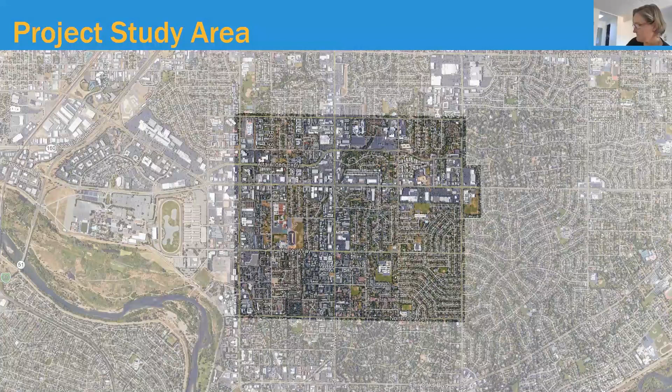To ground everyone in the project location, this is the project study area. From the west, the boundary is Howe, and on the east it's Watt Avenue, with the exception of a small bump out to the east of the intersection of Arden Way and Watt, to include the middle school and the development to the north of that. On the north, the project study area is bounded by Cottage Way, and to the south, Northrop Avenue. So that's generally where we're looking in the project study area.

We'll have another design charrette where we'll advance. What you're going to see tonight is a lot of starter ideas - we like to call them starter ideas. Again, it's not set in stone at all. It's about ideas that we generate based on the conversation we've heard, and we'll come back in October for the second part of the charrette.

What we've seen in the corridor, as you know, we've gone through virtual tours in different areas and have been out on the corridor. I won't dwell too much on this - a lot of you have seen these slides before, but just a reminder that it's very easy to navigate this area by car. There's a lot of space allocated in our streets to the motor vehicle.

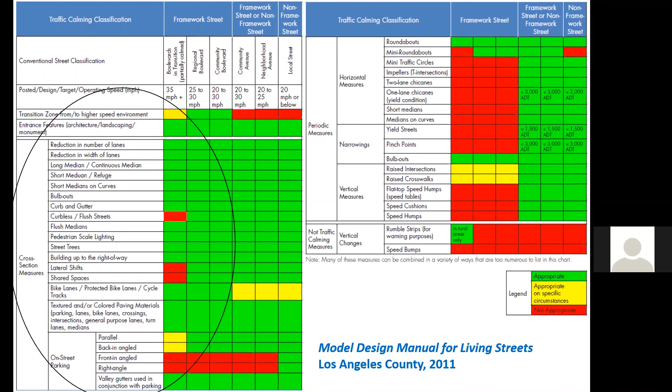Now, the design team has looked at a whole bunch of different types of measures to help motorists slow down while simultaneously achieving the vision of the community. Some of the ideas you'll see are the reduction in the number of lanes to make room for separated bike facilities and proper sidewalks and trees. You'll see street trees, some small medians, these sorts of things.

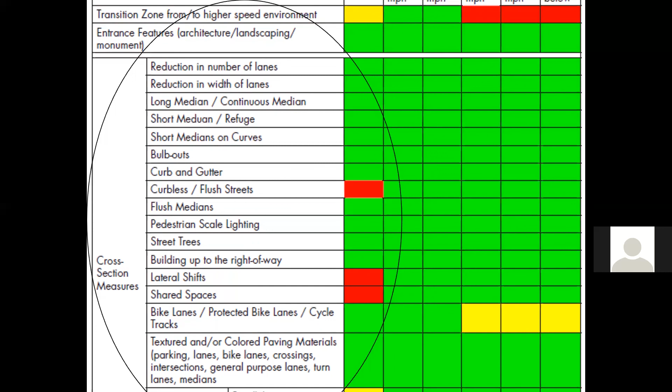The reason the federal government wants to do this is to make bicycling more appealing to the vast majority of the population. There's a small fraction of people who will ride anywhere. There's some enthusiastic people that will ride in conventional bike lanes, but most people are only comfortable riding when they have separated bike facilities. That's why the federal government is emphasizing that.

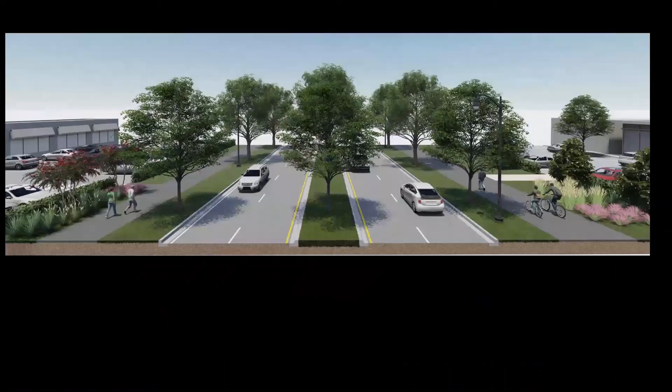On the right-hand side of this image, this is a big arterial road - you'll see a shared use path with some trees, so that's a comfortable edge. On the next slide, you'll see some painted bicycle facilities, either down the center or down the edge, buffered with a little 2 or 3 foot wide strip to keep them separated from motorists - fairly comfortable as well. But the home run is if it's completely separated with street trees and a curb and some sort of physical separation. Then kids, families, all the potential population of cyclists can use the street comfortably.

So the idea is to create what we call complete streets that are comfortable for all the different user groups. It's easy to accommodate buses, trucks, cars, but it's more difficult to comfortably accommodate the vulnerable users - the pedestrians, the cyclists - and also to support the businesses, neighborhoods, institutions, and recreational areas. In particular, out of that vulnerable group, there's some very vulnerable folks, like those with a mobility impairment or a sight impairment, or children, or elderly folks who might walk slower when crossing the street. These are the sorts of folks we're really interested in accommodating.

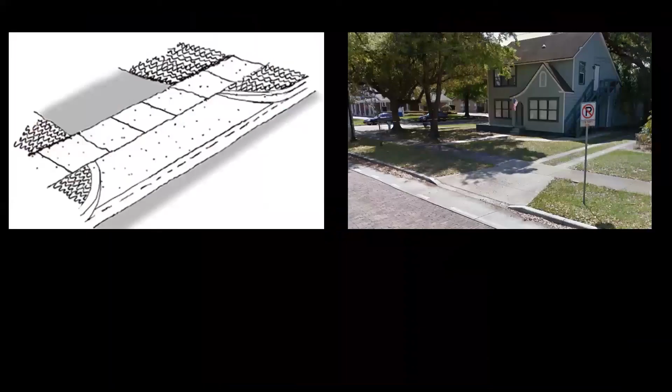Some of the changes we'd like to make are simple things like how to put a sidewalk across a driveway. The diagram on the left shows the sidewalk going across at the level of the sidewalk - it doesn't dip down to street level, so it's much more comfortable for someone to cross. Any elevation change is made up in what we call the apron between the sidewalk and the street, and there's a good example of that in the photograph on the right.

So they would follow the guide down to the edge of the street where there would be a warning strip, and then a push button in a predictable location, to get the signal to cross the street. These are the sorts of things we can do to enhance the built environment for people with various disabilities.

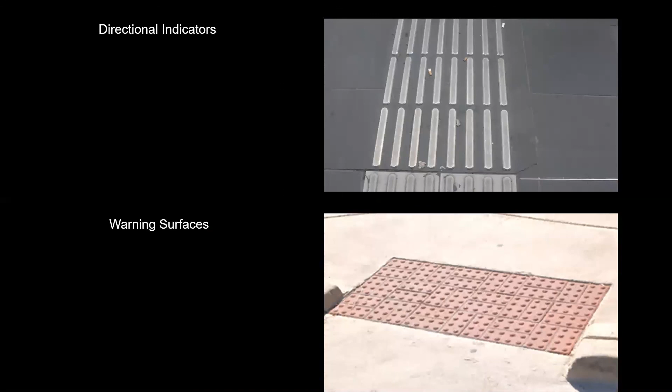So we have warning surfaces in the United States, but what we're suggesting to enhance things is what we call directional indicators.

Now, one of the past practices has been, when you're designing a street, to work from the inside out. Make everything okay for the motorists during peak hours, 20 years in the future, that sort of thing. And then the leftover spaces for trees, sidewalks, bike facilities come afterwards, if they fit. And that's been the problem in this area — they didn't fit, and so all of those populations were left out.

So what we'd like to do, and what is best practice, is to start thinking from the outside in, where you accommodate the vulnerable folks first, and then work your way in, using the balance of the space for the strongest folks, the folks in the cars in the middle. So you start from the outside and work your way in.

We have an idea for a parkway on what's now the Alta Arden Expressway. One of the cool things about parkways is the nice feeling as you go slowly through that sort of park-like environment. And instead of doing signals, we're thinking maybe do roundabouts, which keep things moving.

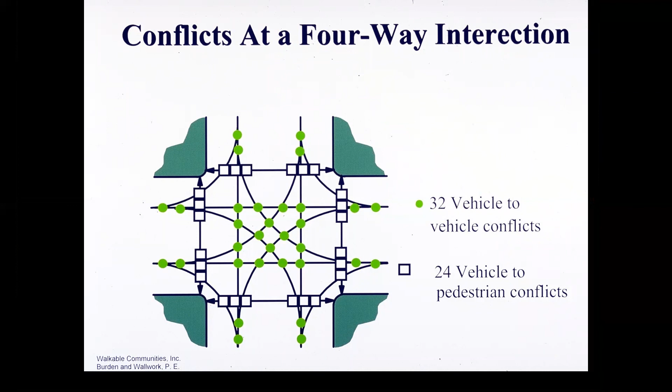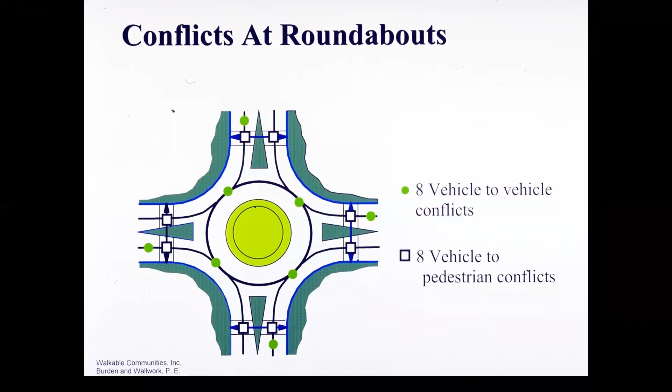One of the nice things about roundabouts is they have very few conflict points, unlike signals like shown here — look at all the different ways you can crash at a signal. At a roundabout, there are far fewer of those. So it's no coincidence that there's about half the number of crashes in roundabouts compared to signals, and about 80 to 90% fewer deaths and injuries. And they're quite safe if they're well designed for cyclists and pedestrians.

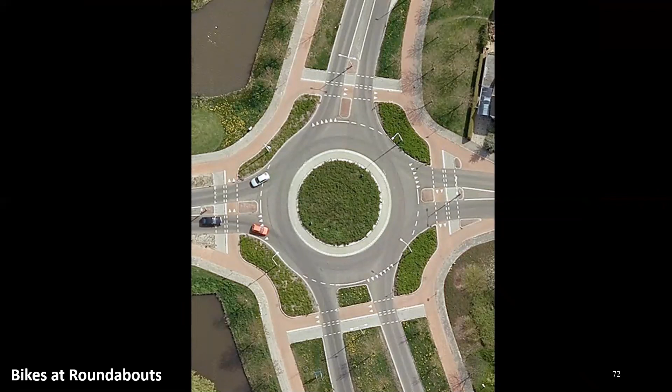This is what we're proposing in this corridor, so you don't have to ride in the street itself. You just have to size these things so deliveries and so forth, and fire trucks, can get through, but that's routine and not difficult.

The disadvantages of roundabouts — there are a couple. Sometimes they don't fit in the space, so we'll have to test it to make sure the roundabout fits. And roundabouts don't work very well at really high traffic volumes, but that's not the case along the Alta Arden Expressway. But there are tons of advantages: crash reduction, emission reduction, speeding reduction, friendly to active transportation, and it's attractive. So plenty of reasons to support roundabouts.

I'd just like to end with a few — there's 4 — what we call design directives. We heard so much from people that this elevated itself to being a design directive. The first one, of the 4, is a comfortable, safe place to walk and ride a bike. That's super important.

The second one is to create spaces for trees and shade. It's so hot that if you don't have trees and shade, people still won't walk and ride their bikes as much as they ought to.

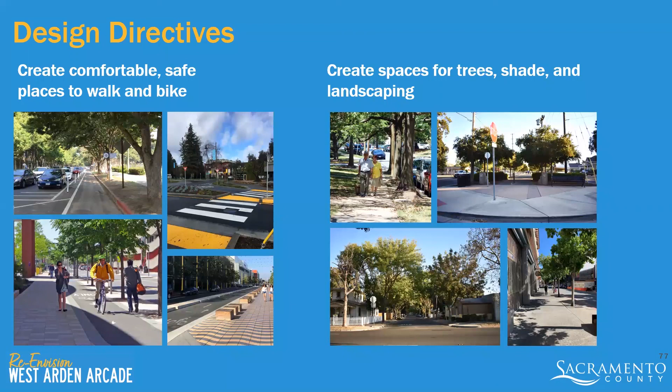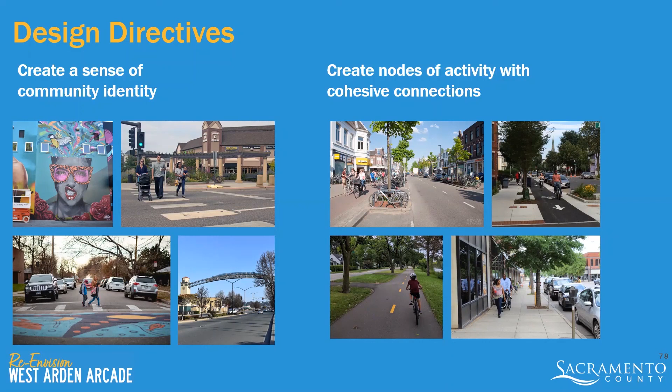And then finally, to create a series of connections and corridors that lead to nodes of activity, so there are things to go to on foot and bike in the community. That's very important for social cohesion. All these things add up to a multimodal place that reduces greenhouse gases, helps environmental justice, helps the climate, helps with affordability, resilience, public health, advancing the Americans with Disabilities Act, and social cohesion.

There's all sorts of collateral benefits for this type of thinking.

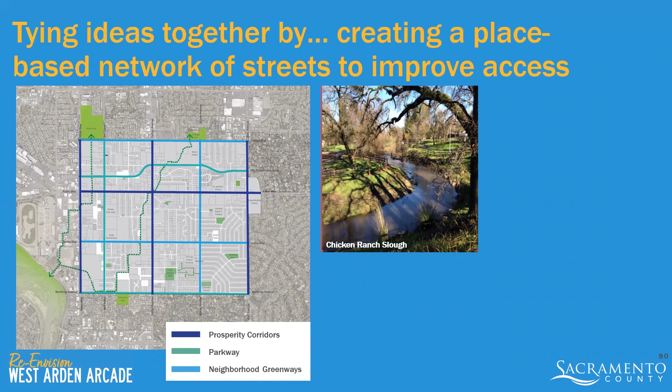After mapping where people like to gather and where people are heading, and looking at the future function of streets, what emerges is an initial idea about having nodes and corridors.

Each street, and it's not just the street right of way but also what's happening on either side, would create a corridor, and they would be corridors of different types in the future. Not every corridor is the same, and we want to create a sense of identity. This can partially be done by thinking in terms of mixed use corridors, more neighborhood serving corridors, and greenway corridors. As you can see, there are three different colors indicating this on the map.

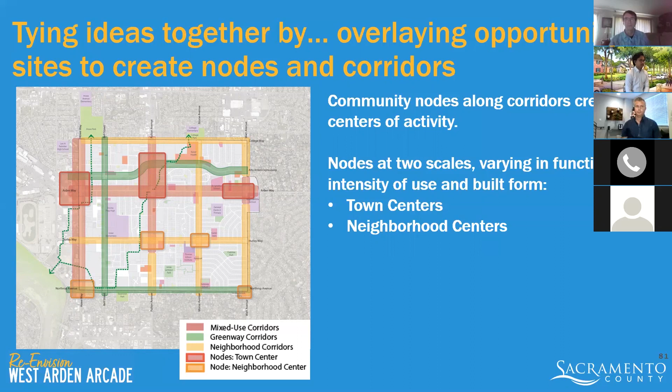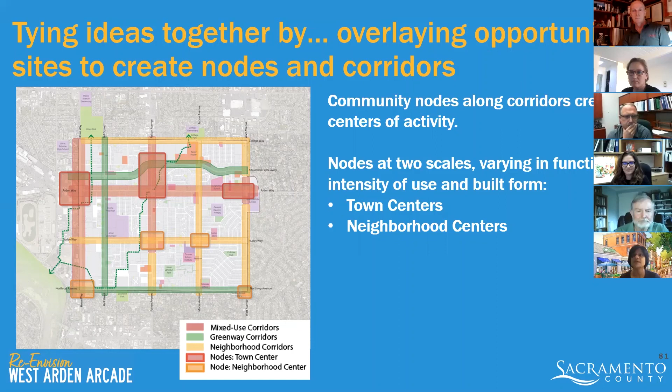Since we don't want each place along a corridor to feel exactly the same, we think in terms of nodes, areas where important corridors intersect. That's a place where something special can happen, where the intensity of uses and activities can be slightly more. We can also think in terms of different types of nodes. The first are town centers, a higher intensity use and more of a regional destination.

There's a reason for that, because when you have a mix of different uses, people come to these places and stay longer, giving a reason to be there, which makes these places inherently safer and more vibrant. This is also an opportunity to introduce features such as shared public spaces, shared streets, and other design ideas we might be exploring.

They're mixed use, they serve the local community. They can be something as simple as your corner store, or something like a local eatery. It can even be a venue for the local farmers market. It doesn't matter exactly what the uses are, but the point is that these are walkable places, inherently mixed use, and places where people would come and congregate.

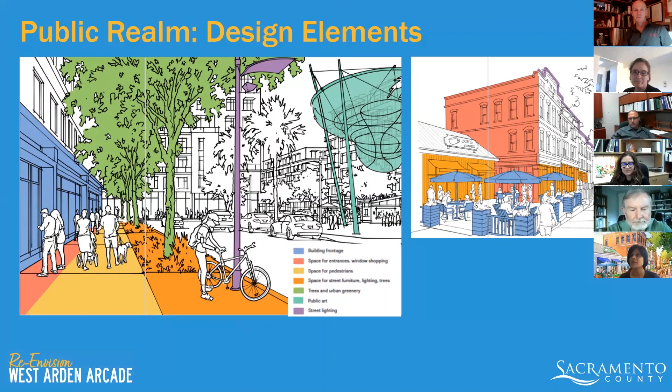So here are some of the common design elements we're going to be considering when we think about the urban form and the urban design elements that will guide the street design. The two go hand in hand, and these are just good design principles that we'll be considering.

One thing is about trying to carve out shared open spaces. These in particular can be just part of the private realm. They don't need to be new public spaces the city needs to discover, but through good design and good coding standards, we can create privately owned but publicly accessible small spaces. It's more about how these places are designed and where they're located, rather than the actual size, for them to be successful. Also, we have fairly large lots, and as they redevelop, they would have internal private spaces.

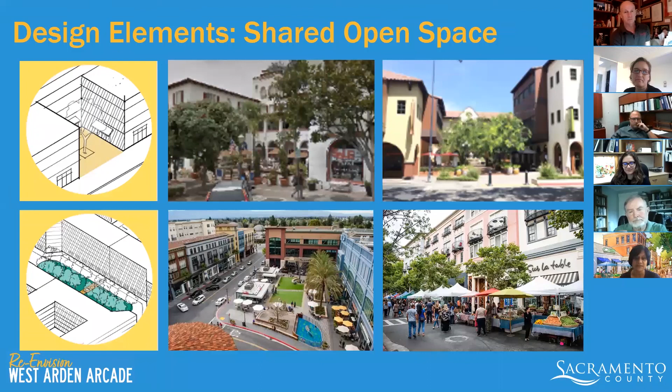So it'll be important to think about how the buildings orient, how they address internal areas. Are they just parking and servicing areas, or can they also serve the function of an open space which would be publicly accessible? Similarly, it's important to see how the buildings are oriented. We can't think of any space being vibrant and where people want to be unless you have entrances facing onto the sidewalk or onto the common shared spaces. So that's an important consideration, is building orientation.

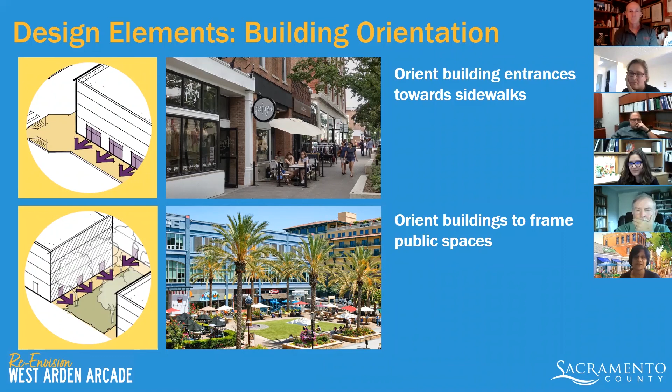And also important is parking lots. I know we all need parking lots, and there are many uses for which they're essential, but honestly, I don't think anyone enjoys looking at a parking lot or walking next to it. So there are many, many ways by which you can actually shield the parking and servicing so no one needs to know it's right there. But it creates a much more walkable and pleasant environment when you're going along the street.

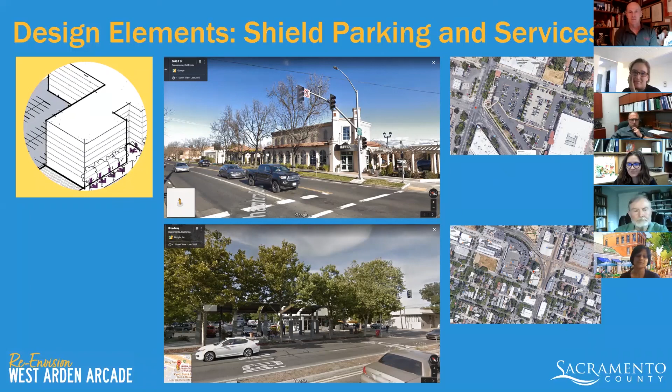So again, just simple ideas to try and activate the spaces, and that takes us to the place-based street network, and I'll hand it over to Patrick, who'll be dealing with these slides.

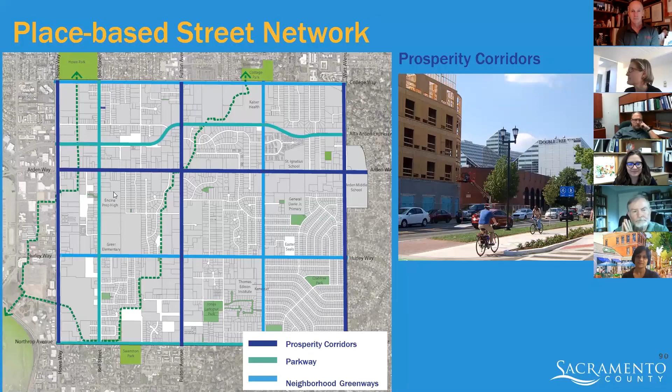This is an example of the prosperity street on the right, and if you click through, an example of the Parkway street. So really building on the different character elements of these.

One of the big things we heard throughout the week was really providing green space and shade. That was a major thing people wanted to see: safe spaces to recreate, be outside with your family, ways to get to school, and opportunities around that.

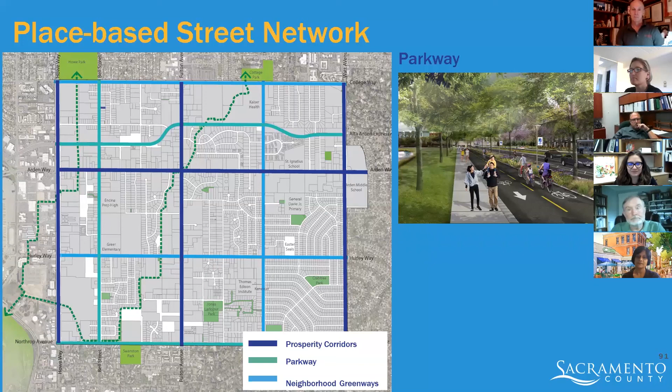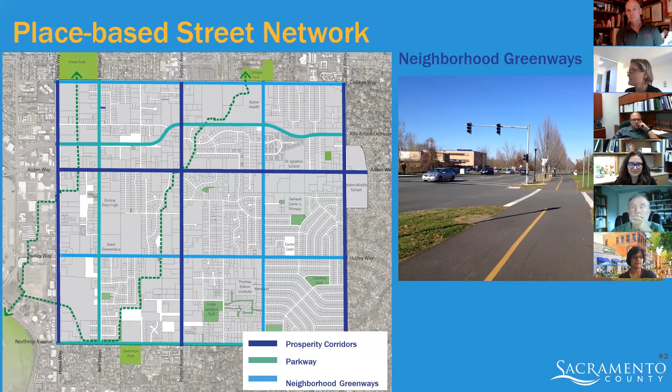Working our way down to a smaller street, thinking of neighborhood greenways. How do you connect really to those parks and key destinations? Parks and schools really are what this network is meant to access. Bell Street, Northrop, going to the American River Parkway - those are kind of how all of those would help funnel from the neighborhood to those destinations.

So really what we wanted to talk about - and these are all just starter concepts - was really how to knit it all together and where to start.

One of the options we're coming up with was this term about a responsive implementation strategy. We varied it out into 5 steps, and this is a street-focused plan, a street space-focused plan. We wanted to center that in this conversation.

Our step 1 is really thinking about a rapid community response network. These are the facilities, the streets from everything we've heard this week, that have the least amount of conflicts on them, but that access some really important key destinations and provide community-wide benefits.

So they're the ones such as Hurley Way, which gets you to the American River Parkway riverfront, to the Parkway, and then also to Bell Street, close to the schools, and all the way across to Watt. That would connect you with Morse, and then up to the north to College.

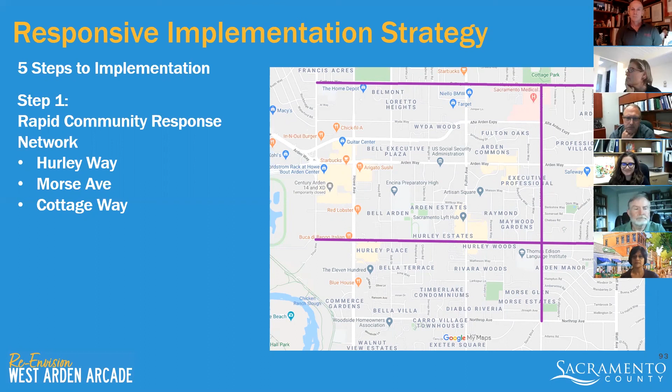This really works to avoid the major commercial corridors and helps with the idea of getting something on the ground really soon - a way that we can make sure this plan shows up in the community.

What I'm going to do is walk through each of these steps, and I'll show some cross sections that we'll talk a little bit more about later too, but just to give you an idea of what we're talking about.

What you can see on the left is the existing Cottage Way cross-section for the street. It has 3 lanes of traffic and on-street bike lanes. But what we've heard this week was that even if we have on-street bike lanes in the community, they either get blocked by vehicles or by trash cans, or they just don't feel comfortable for people to be out there.

Especially when you think about wanting to be out there with your family - would I want to take my grandma out there to ride? That's kind of how I think about it. Or would you feel comfortable with your kids? The way you might feel comfortable might be different depending on who you're with, and wanting to make this a family-friendly community is what we heard.

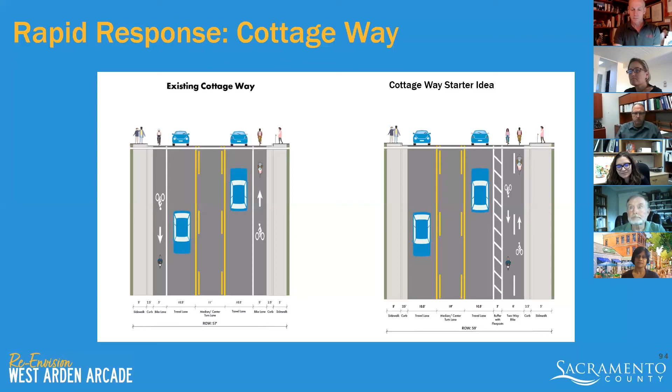One of the ideas on the right-hand side, the starter idea here, is really about this network of 3 streets that each have a consistent facility type. It's really legible and easy to navigate getting around the community, but it also has the striped buffer between the 2-way separated bikeway that has both a horizontal and a vertical separation from traffic - things that could be put on the ground with paint and buffers in the near term.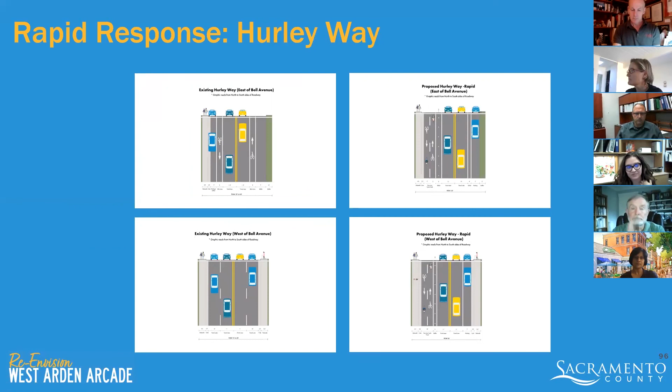So the idea here is in the community where we have 2 lanes of traffic, on-street bike lanes, and sometimes parking, would really be to shift where the bike lanes are and put them all on one side, on the north side, where you would really be accessing the schools. So that would really get you to the schools, into the park, and to the Parkway. Similar setup as Cottage Way, but also leaves parking there to make sure this gets rapidly implemented.

So step 2 is, now that we have the bright purple lines, which were the step 1 rapid network, really building out the community-wide network. If you think about it as a framework, you'll build it out to get all of the facilities to connect, so you'll have a circuitous route within the community and connect to the overall Arden Arcade network.

This is looking at Bell Street, at Encina High School, the elementary school and the upcoming middle school, and Empowerment Park. Bell Street and Northrop Ave would be kind of smaller community scale neighborhood greenways, giving you that tree canopy feeling, the shade that makes you want to be out there to walk and bike, and those would connect you to a larger Alta Arden Parkway.

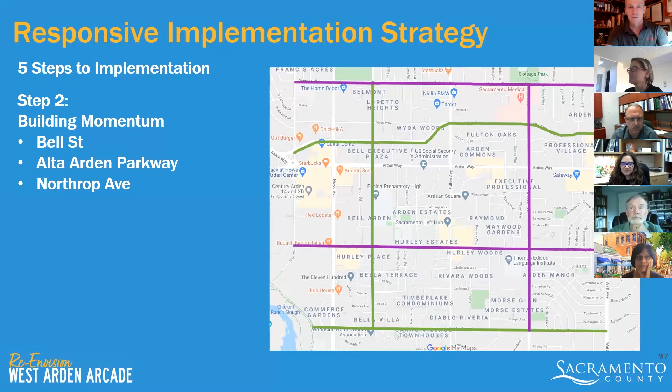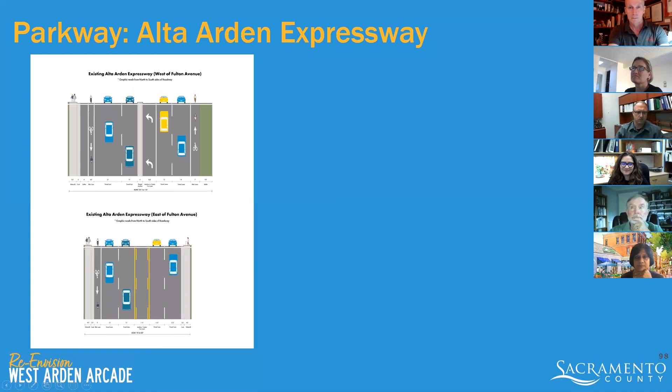Alta Arden itself has a lot of opportunity and is really wide, but doesn't actually have a huge amount of volume. As you can see, there are a few different sections of it, and we'll go over the opportunity for the cross-section in a sec, but there are wide opportunities there, so we'll come back to that one.

For Bell Street, one of these smaller neighborhood routes, we currently have about 57 to 60 feet of right-of-way, 2 lanes in each direction, bike lanes. What we heard resoundingly from folks at the elementary school and the high school is that people often block the bike lanes during drop-off and pickup, so for people biking to school it sometimes becomes unusable or uncomfortable to ride.

So really wanting that separated space, as you can see on the left-hand side, it would be providing parking, but then providing trees intermittently to keep shade space for people on both sides of the street. It's important to have access on both sides to make sure it's comfortable for everyone. On the right-hand side is a two-way separated bikeway, all at the same level, with shade on both sides, so if you're biking or walking you'd be comfortable, with a dedicated pedestrian space as well, so you can get to and from the schools, accommodating the larger volumes of people walking to school on Bell.

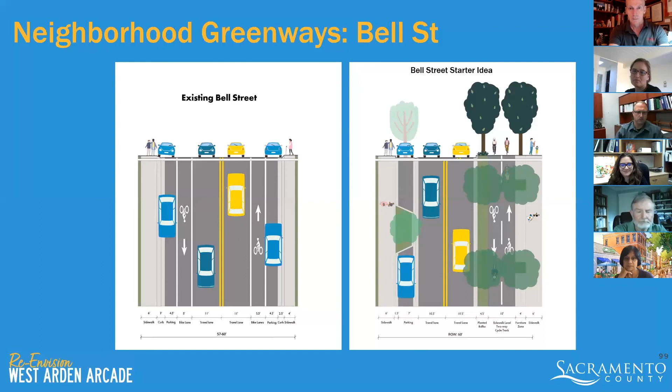If you want to go to the next one - Northrop, a little bit similar to Bell. Northrop is sometimes a little bit wider, but same kind of configuration. We'd actually be able to preserve parking on both sides of the street here, which is nice, so we can do trees intermittently in those parking configurations. What's a little different is that you'd have a shared facility.

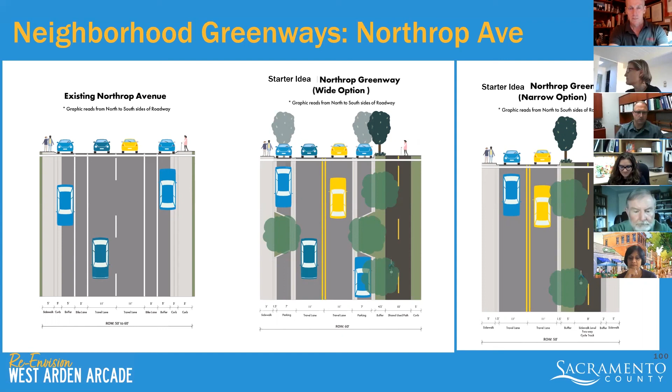Think of some of those images that Ian was showing earlier with some of those really nice trail-like facilities, building that greenway feeling to access the Parkway, so that same feeling connects to each other. When we narrow in some of the more narrow sections, on the right-hand side you still preserve that same feeling, but can provide separate space for walking and biking.

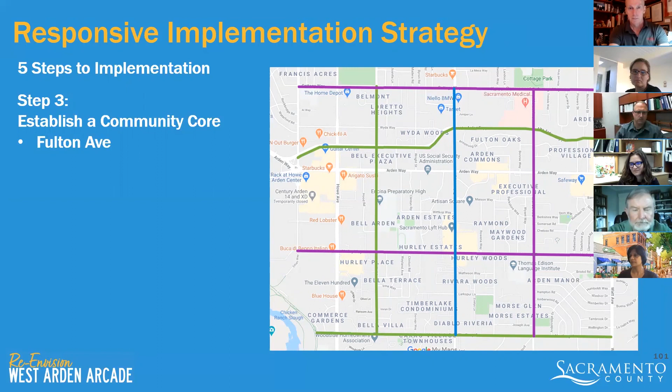So how do we build on that? Step 3, once you have the overall circuitous network, is establishing a community core. The idea is that Fulton becomes the heart of the community, building on a lot of the great work that the PBID, the Property Business Improvement District, has been doing there in the northern part. We really like the idea of extending that feeling down through the rest of the corridor and through the neighborhood parts. Initially we would think of narrowing some of the lanes.

So as you can see on the left-hand side, there is the wider cross section. In the northern side where you have the median in the middle, there's actually a built-out median as well in much of the area. But right now we have 2 lanes on either side of traffic, and then bike lanes. What happens with the bike lanes, if you go out there, that we heard a lot about, was that because it gets so close to the gutter and the traffic, it really feels uncomfortable, even though there is a dedicated space for cyclists.

So in the northern end, initially we might not consider doing anything and kind of think of it over time, but south of Arden Way, we're really considering reallocating some space to those people walking and biking and making it more of a pedestrian atmosphere.

So really, if you dropped a pin, I liked to think about this as we were talking about it. If you dropped yourself down anywhere in the project area, where would you want to gravitate to? Often we heard that kind of Fulton was one of those places, while Howe and Arden were more kind of regional destinations, so this is an opportunity to create that community center.

So you still provide landscaping, provide a fully raised separated bikeway, one on each side. As you get a wider cross section, it's actually easier, if you have the space, to have one-way cycling facilities on both sides. It actually helps work with your signal operations as well, but this provides a much wider pedestrian environment.

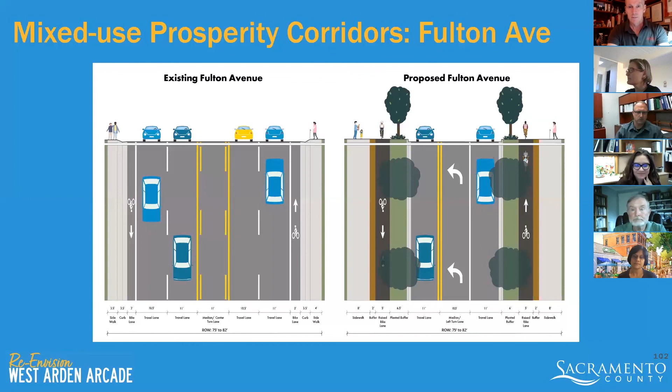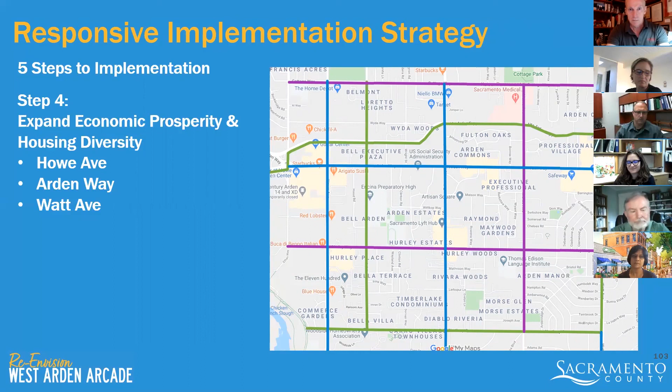So step 4 is really kind of what Vitaly was talking about, those larger corridors, our prosperity corridors. Where do we expand our economic prosperity and housing diversity? That's really taking a look at those major corridors and parking lot opportunities along Howe and Arden Way, and then Watt Avenue, all the way on the eastern part of the corridor.

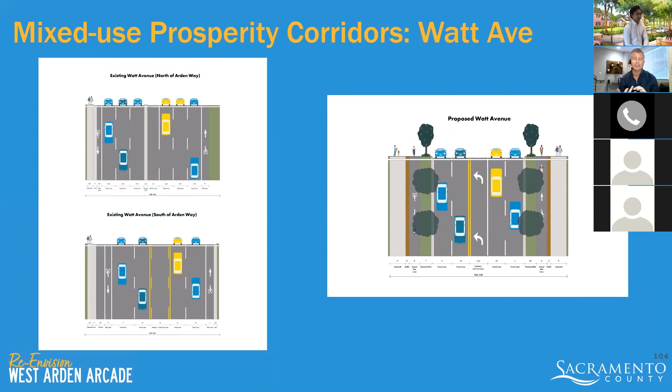But really with that wide cross section, we have the opportunity to create dedicated pedestrian sidewalks and separated bike facilities, using the same kind of one-way configurations. Because it's so wide, you want to make sure to maintain access where you can on both sides, and then still provide enhanced transit opportunities. Where you see that landscaped buffer, intermittently you could create transit shelters and bend the bikeway back a little bit behind those. So lots of space and opportunities for transit improvement with this type of configuration as well.

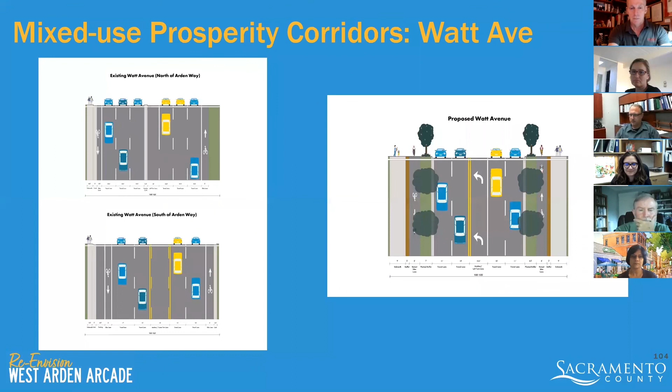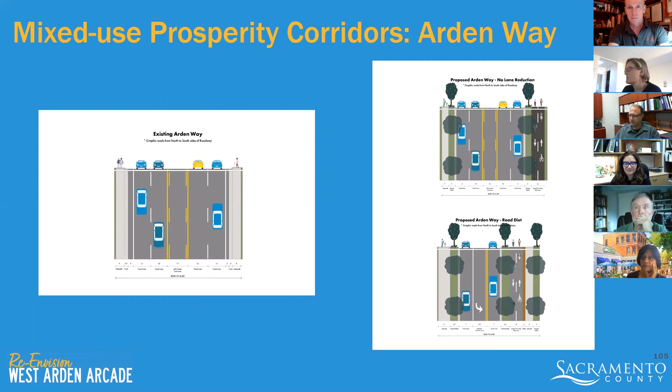And then on our major corridor, we have Howe, on the farthest west. With Howe, there are 2 different cross sections. On the northern side, there's a similar 5-lane or wide cross section with sidewalks.

And then as you get further south of Alta Arden, it's a 7-lane configuration. Taking a look at the traffic volumes, we think there's an opportunity to continue the same cross section for vehicles throughout the corridor, creating a more consistent space where vehicles are weaving less, so there's actually a good consistency and good flow with that.

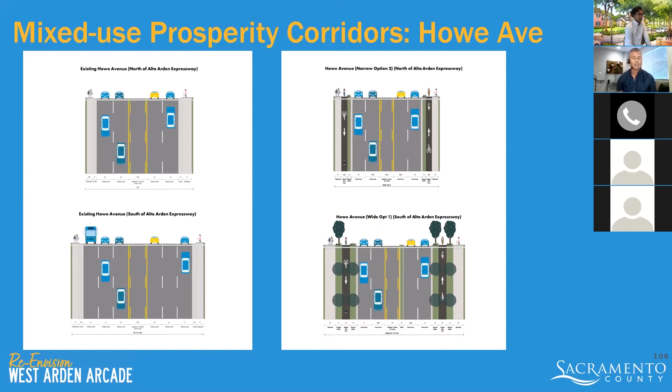Similar to what we were talking about with Watt, we have an opportunity to provide 1-way separated bikeways on both sides of the street and dedicated pedestrian spaces. As the cross section gets narrower, shade might not be able to fit in there, but it's not a huge part of the corridor.

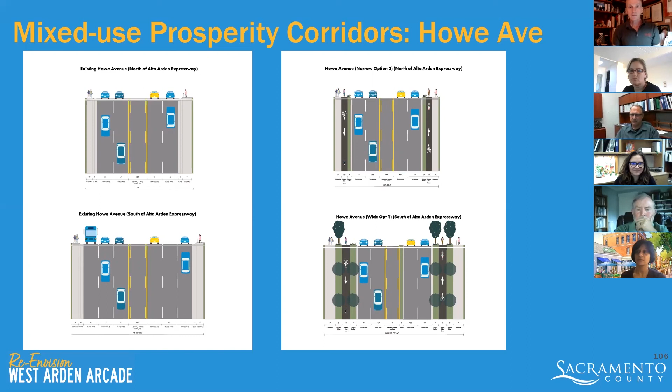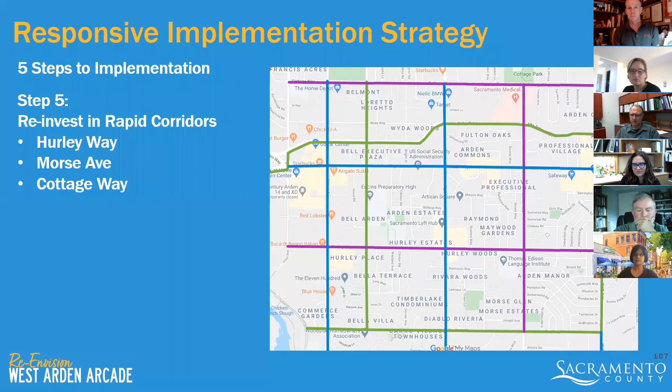And then step 5, making sure we come back and reinvest in the rapid corridors. That's one of the biggest things I hear, that people are afraid if you come and invest in a rapid fashion, that's it, that's the only time you're going to get investment. So we want to make sure this plan is being responsive to that, and that we are planning to make sure those come back.

As you can see here from Cottage Way, we had the rapid idea at the beginning, but really making sure we bring that up to the standard the rest of the community would have. So a 2-way shared facility on the right-hand side for build out, and sidewalks on the other.

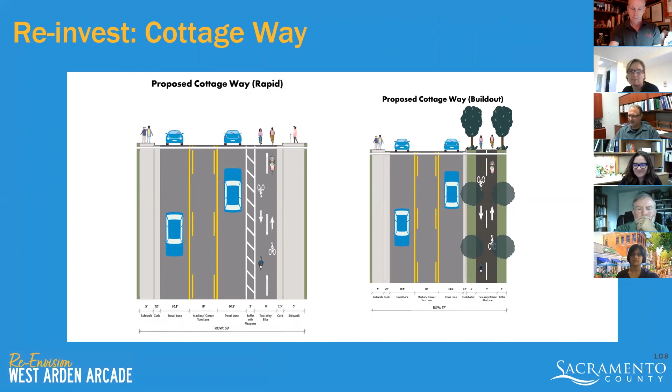And then Morse would be a similar fashion, and also Hurley. So you'd be able to build all of that infrastructure up to be consistent and legible throughout the neighborhood.

And then I think with that, I hand it back to you, Cindy.

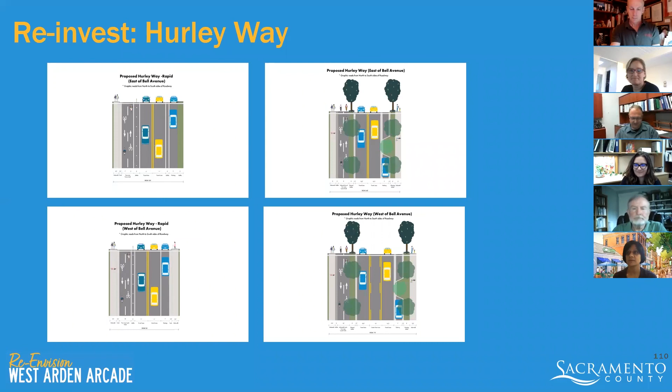So thank you all for the rich conversations. Hopefully you had a good conversation in your breakout room, and know that this is again the beginning of the process. We've heard from a number of folks who are new to the Charrette this evening, and I really appreciate the time and effort you made to be here, and we're listening to you. There's been some great new concerns raised and elevated in this conversation, something for us to continue to think about as we refine some of the ideas around the approach to the streets and the development pattern we're suggesting.

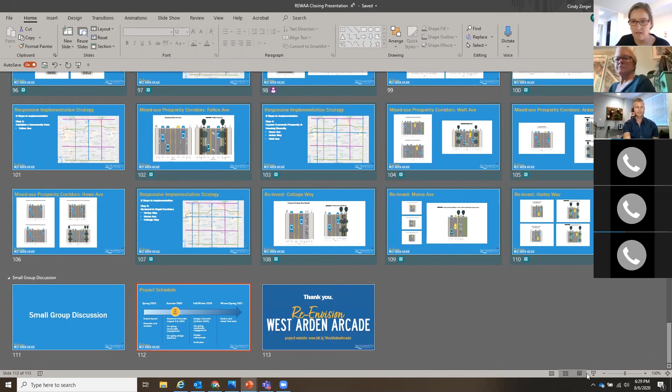This discovery, again, we like to call it discovery for a reason. We're hearing from you as representatives, people who live in the community, and also representatives of the community. We'll continue with ongoing engagement this fall. You'll see a number of other information on the project website. Then we'll have another design charrette where we'll advance some of our initial starter ideas during the October charrette, and then we'll continue ongoing engagement, draft the plan, and look toward fall and winter and spring of next year, when we'll be developing a final plan.